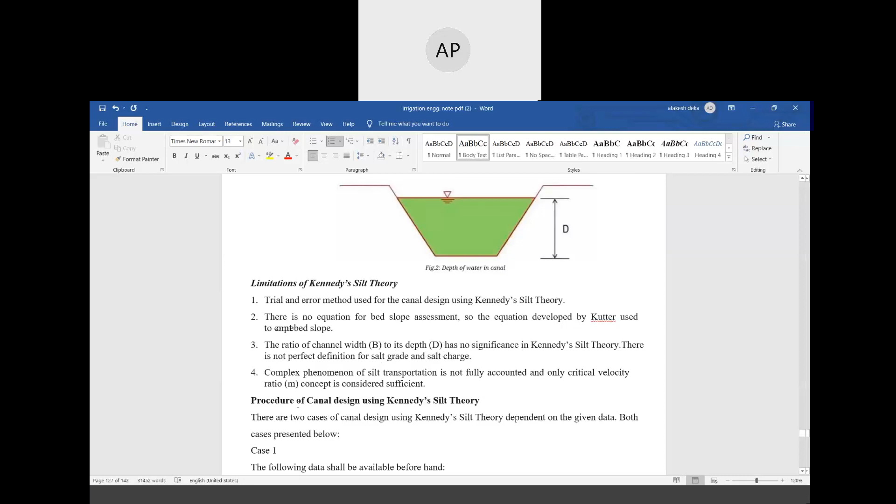And the complex phenomenon of silt transportation is not described in Kennedy's silt theory. Again, the procedure of canal design using Kennedy's silt theory. So what are the procedures? Case 1. We have discussed different cases, I think. Case 2. Okay. And next is Lacey's theory. Lacey's theory of canals.

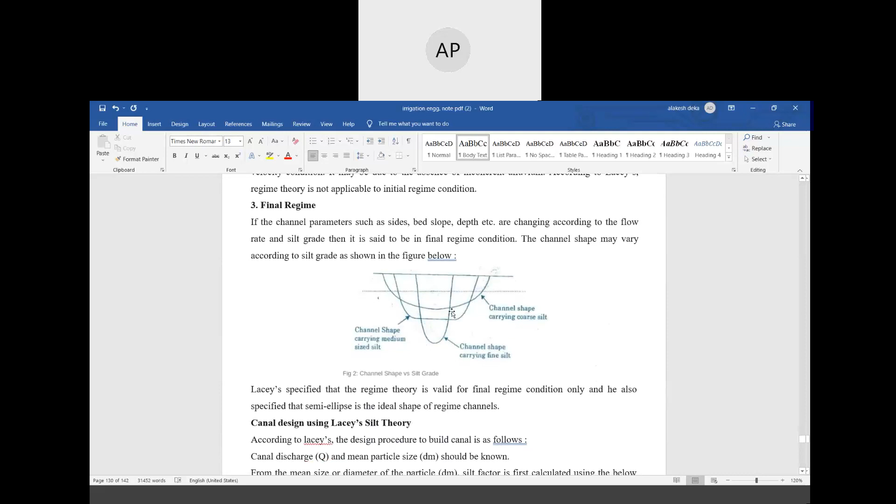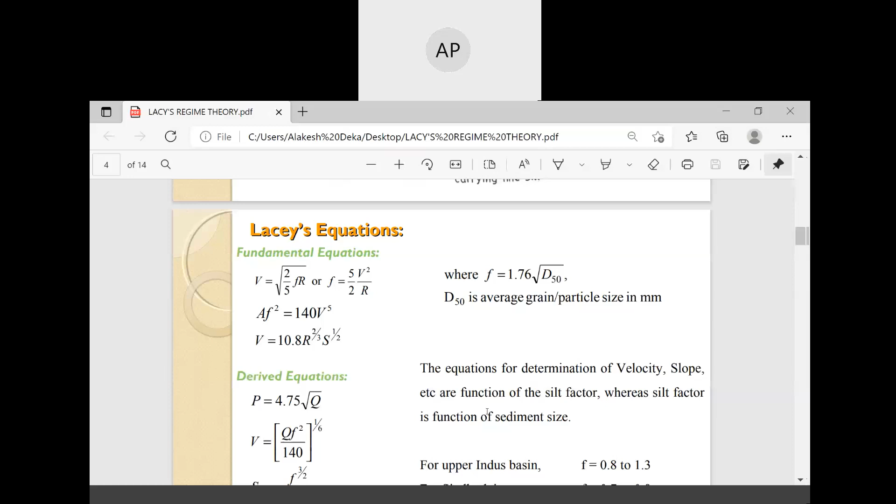Okay, let me share another screen. Lacey's theory is called Lacey's regime theory. The full name is Gerald Lacey. And he gave information about regime in 1930. So, what is his hypothesis?

According to his theory, the dimensions and slope of a channel to carry a given discharge and silt load in easily erodible soil are uniquely determined by nature. So, according to his theory, silt is kept in suspension by the vertical component of eddies generated at all the points of force normal to the wetted perimeter.

So, what is the wetted perimeter? Suppose this is your channel; this whole side is your wetted perimeter, isn't it? So, along the perimeter eddies are formed, and these eddies are responsible for keeping the silt in suspension. Okay.

And regime channel. What is a regime channel? A channel is said to be in regime if there is neither silting nor scouring.

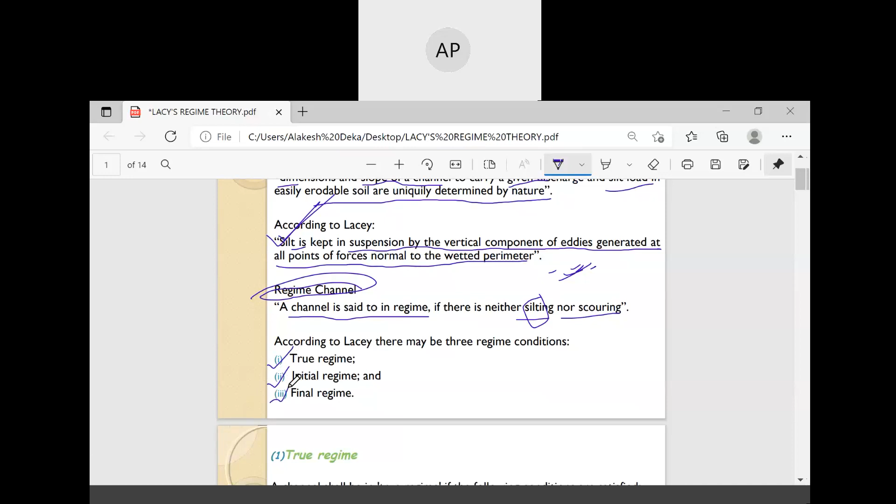We call that channel as regime channel. And according to Lacey, there may be three types of regime. Okay, one is true regime, initial regime, and final regime. So, what is true regime?

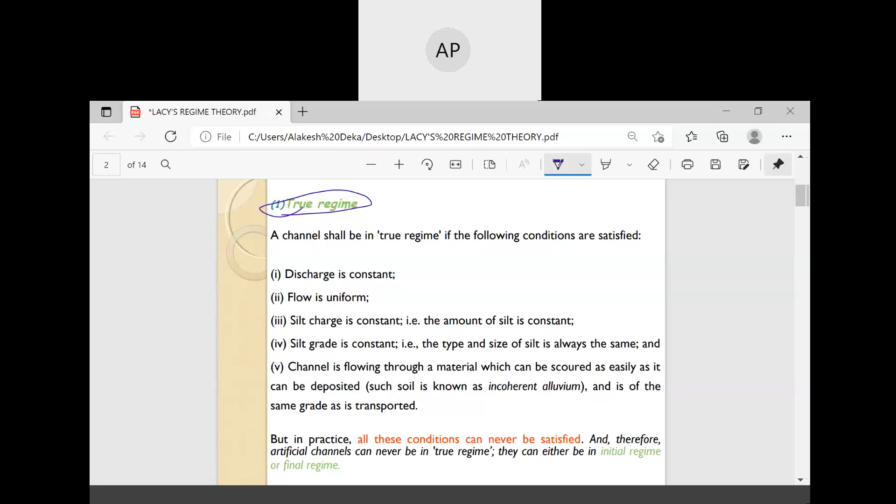Okay, so what is a true regime? A channel will be in true regime if the following conditions are satisfied. What are the conditions? If the channel discharge is constant, if the flow is uniform, and if the silt charge is constant, that is the amount of silt is constant.

Silt grade is constant, that is the type and size of silt is always the same. And channel is flowing through a material which can be scoured as easily as it can be deposited. Such soil is known as incoherent alluvium, and it is of the same grade as is transported. So these are the conditions when we can call that a channel is in true regime.

Okay, all the conditions can never be satisfied, and therefore artificial channel can never be in true regime. They can either be in initial regime or final regime. See, there is no channel which satisfies all the conditions. That means a channel can never be in a true regime. Either they follow initial regime or final regime. So what is initial regime and final regime?

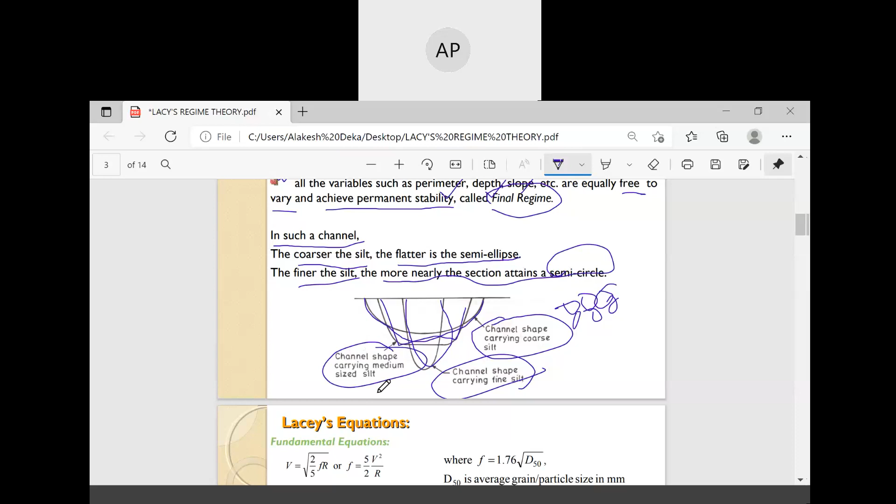So Lacey's equation. What is the fundamental equation of Lacey? The fundamental equation is V equal to root over 2/5 fR, or f equal to 5/2 V²/R, where f is 1.76 root over d50. Where f is called the Lacey silt factor.

And from this equation you can write V equal to 10.8 R^(2/3) S^(1/2). S is slope, R is the hydraulic mean radius, and V is the velocity. And derived equations.

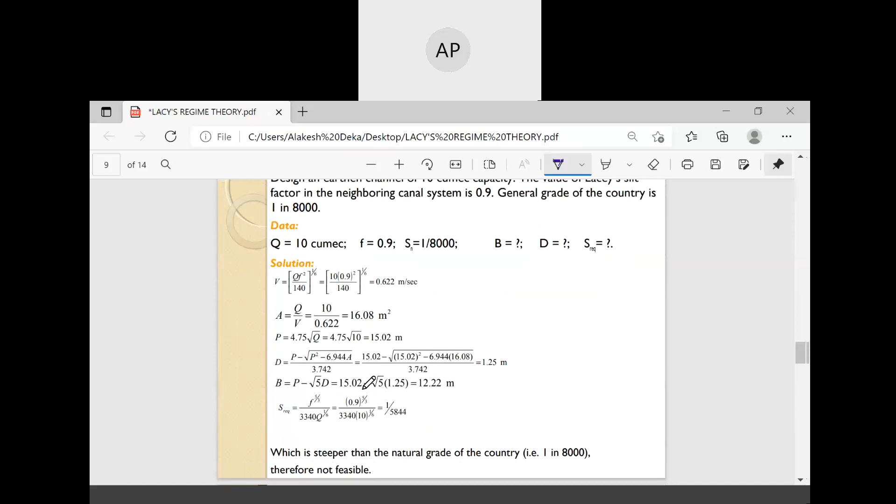The equations for determination of velocity, slope, etc. are functions of silt factor, whereas silt factor is a function of sediment size. So f is the silt factor, and it depends on d50, the grain size of the silt. For upper Indus basin, the value of f equals 0.8 to 1.3. And for Sindh plain, f equals 0.7 to 0.8.

So what is upper Indus basin? These basins are generally located in states like Jammu Kashmir, Himachal Pradesh, Punjab, part of Rajasthan, and Chandigarh. So these basins are called Upper Indus Basin, the Punjab side, Kashmir side. In that place, f is taken as 0.8 to 1.3. And what is Sindh plain?

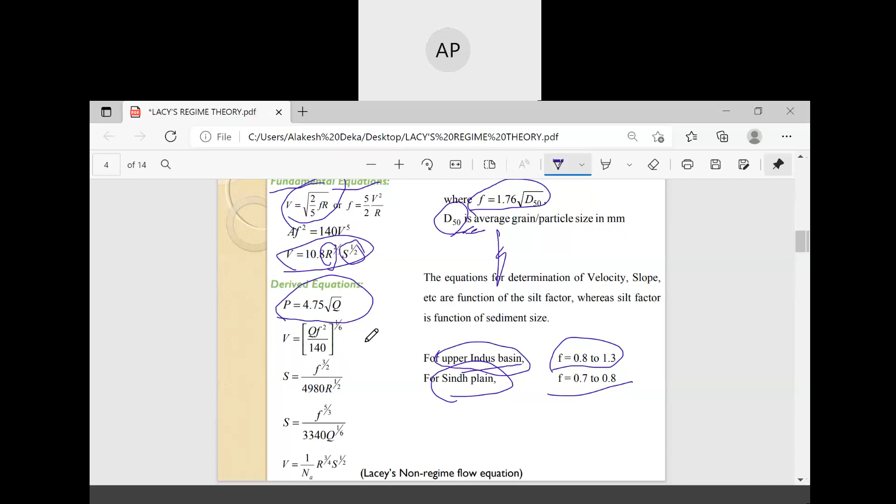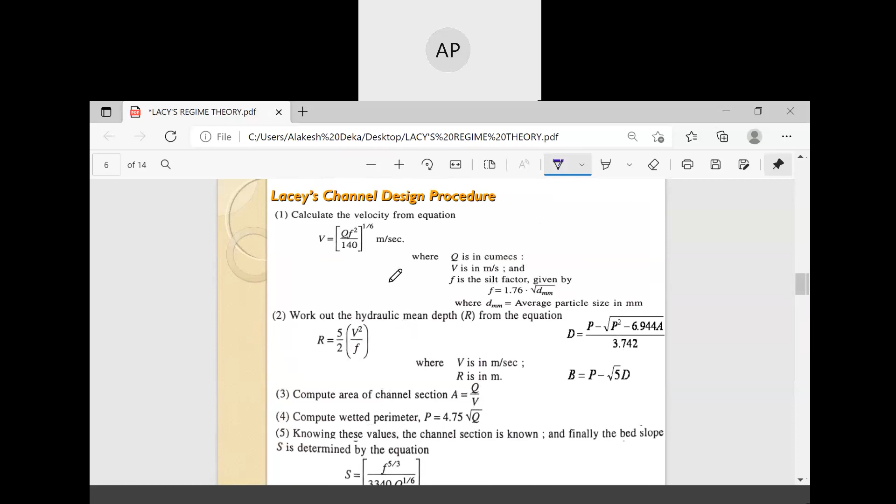So calculations, design of channel using Lacey's theory. What we have to do? So these are the design procedure with the help of Lacey's theory. Number one, calculate the velocity from this equation: V equal to Q F square divided by 140, whole to the power 1 by 6. Where Q is in cumecs, V is in m/s, and F is the silt factor, and it is given by 1.76 root D. Okay.

Next, work out the hydraulic mean depth R using this equation: 5 by 2 V square divided by F. We have to find out R. Compute area of channel section, Q equal to AV. Area we have to find out. We will know Q, we will know V. So from this equation we have to find A.

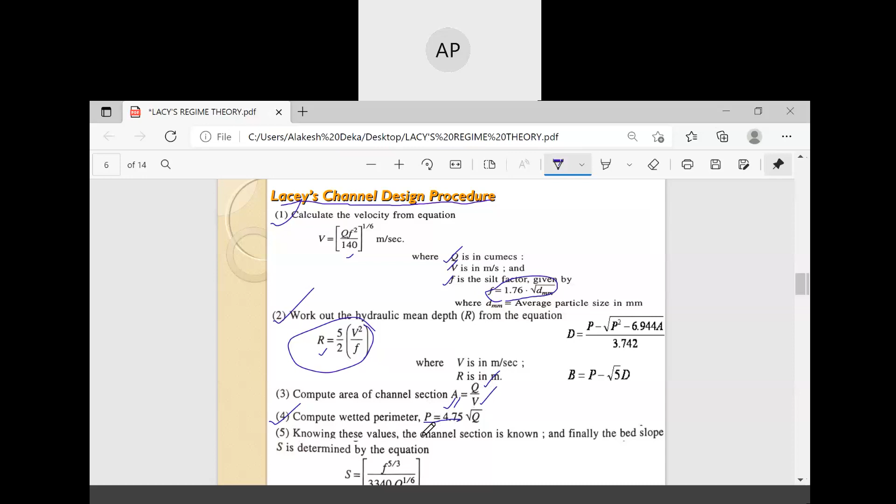Compute the wetted perimeter using this equation, P equal to 4.75 root over Q. Knowing these values, the section is known, and finally bed slope S is determined using this formula: S equal to F to the power 5 by 3 divided by 3340 Q to the power of 1 by 6. So let's see.

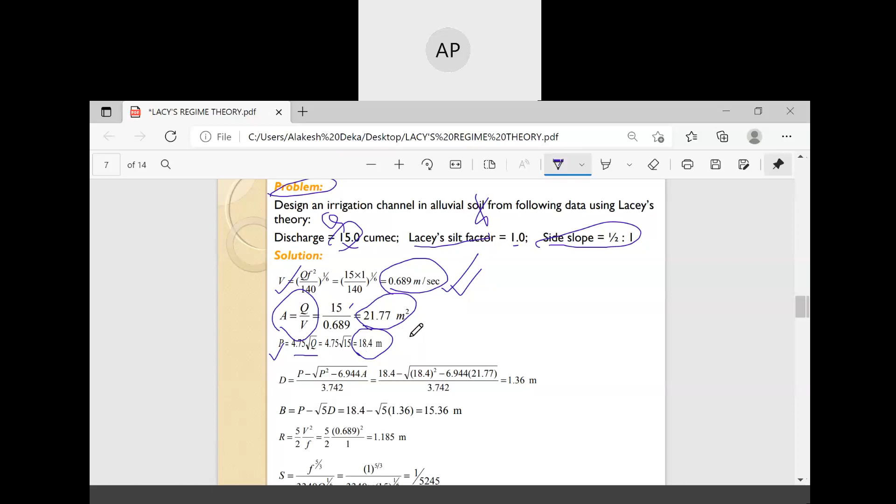Next D, depth. How do you find the depth of the channel? P minus root over P square minus 6.944 A, divided by 3.742. So this is a basic equation which is derived to find out the depth of a trapezoidal section, using perimeter. So D you will get 1.36. Again B. What is B? B is the width, isn't it? Width of the channel. So what is width? P minus root 5 D. So you will get this value.

Again R, 5 by 2 V square by F. V value is this one. So V square by F, F value is 1. So you will get R value is this one. And slope you have to find, 1 by 5245. So these are the, just one second.

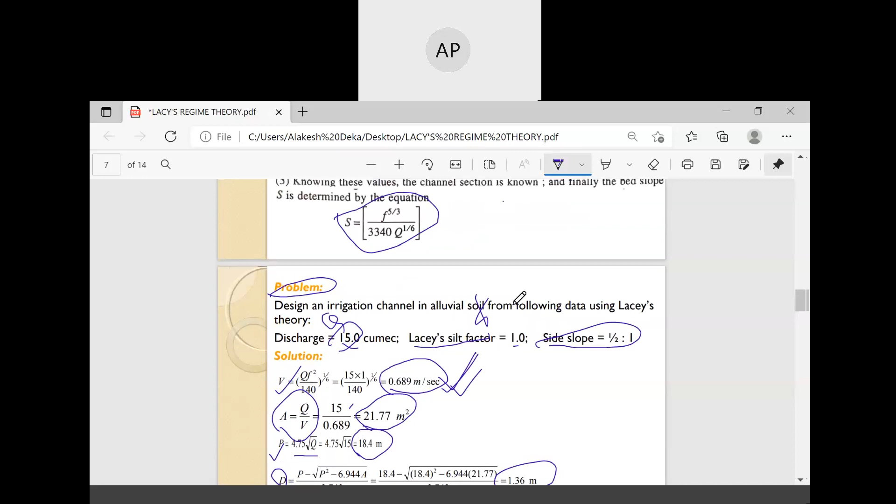So these are the parameters you have to find out while designing a channel: velocity, area, base width, perimeter, hydraulic mean depth, slope. All these values you will get. Another problem is given.

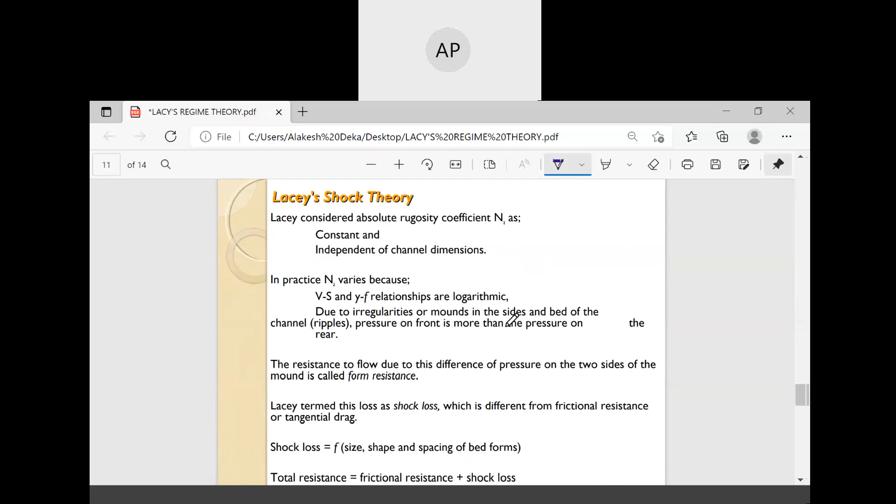Okay, let's move to the next topic. This Lacey's shock theory is not required. Okay. Next, come to the drawbacks of Lacey's theory.

So, what are the drawbacks? Number one, the concept of true regime is only theoretical and cannot be achieved practically, isn't it? So, Lacey has provided us information about design, but that is only theoretical. They cannot be applied practically. Okay, that's why this is the limitation.

Next, the various equations are derived by considering the silt factor, which is not at all constant. Okay, the concentration of silt is not taken into account. The silt grade and silt charge are not clearly defined. The equations are empirical and based on the available data from a particular type of channel. The characteristics of regime of channel may not be the same for all cases.

So he has given some idea of regime. So for a channel, the regime may not be the same. Okay, in all cases we cannot apply that regime to this channel. That's why this Lacey theory is also having some drawbacks. Okay.